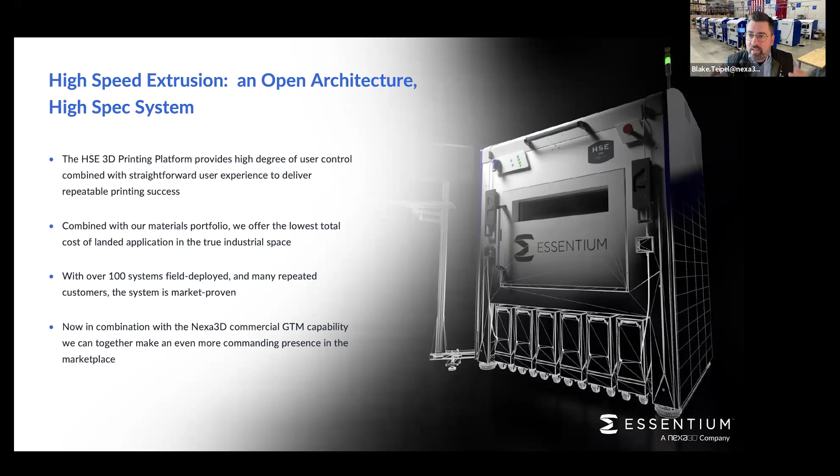Industrial is a broad sector. It touches a lot of the manufacturing and sustainment and parts and supply chain aspects of the industrial community, and we've got many customers in that section.

And of course, not to leave behind biomedical, automotive, or contract manufacturing. As we'll get into in some of the later content, some of the materials that Essentium offers have been custom engineered really for the contract manufacturing vertical.

What I mean by that is we have materials that are ESD, or electrostatic dissipative safe, but they're also clean room safe, and that's a really important distinction.

We have materials at both low and high temperature ranges that can go through things like wave solder ovens and reflow ovens, and be useful in contract manufacturing workflows involving printed circuit boards, printed circuit board assembly, and electronic device assembly and so on.

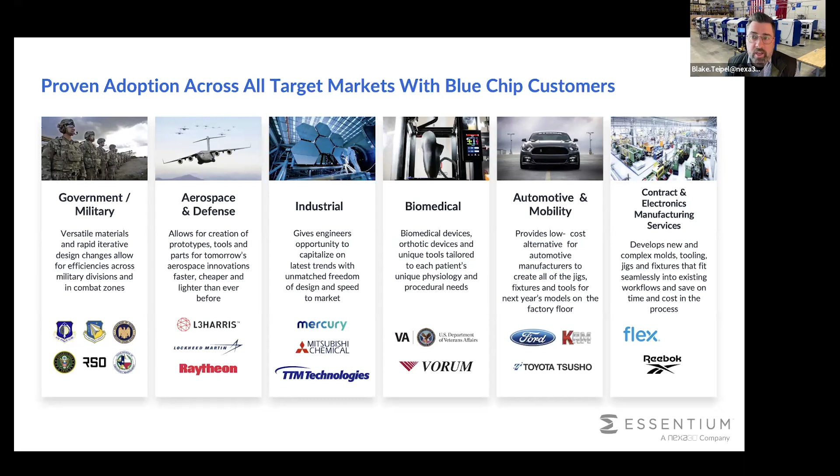So I think that's certainly something that bears mention.

Again, just diving more into a bit more detail on the high-speed extrusion platform. I won't get into all the specs, I'd direct your attention to our website, which has gone into great detail on both the HSE 180 and HSE 280i machines. A lot of details can be found there.

But at a high level, we've got an XY stage at the top of the printer, then a Z tray that descends, controlled by three independent ball screws - two at the front corners, one in the back. We've also got filament feed up the sides, with filament canisters across the bottom.

The machines are supplied at the time of sale with two canisters. If you want to store additional materials on the machine, you can purchase additional canisters. The machine will hold up to 6.

The user interface is off to the side, so you can walk through either a touch panel user journey, or if you're more comfortable with a keyboard and mouse, that's still available. Over time we're going to migrate more purely towards a touch panel based interface, but at the moment you can use our user interface either way, which is very similar to what you'd see with mills and lathes.

In many cases you've got sort of pointer-based control and so on. We decided to go that direction to make the machine accessible to those technicians and users familiar with the CNC type journey.

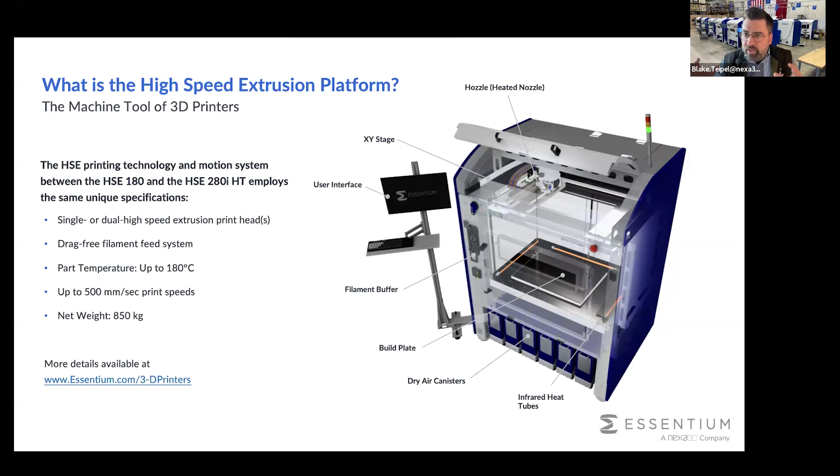If you have batches, if you have repeated part production, turning to an HSE will be awesome because you have the same performance as classic FDM for a single part. But when you need to print more parts, you can dial in geometries, dial in G-code, optimize the process, and really fly. That's how we built the system.

So we've got two different models: an HSE 180 and an HSE 280i. I'm going to talk about the 180 first. The 180 is actually split into three different submodels, and these are pertaining to the temperature ranges of the system.

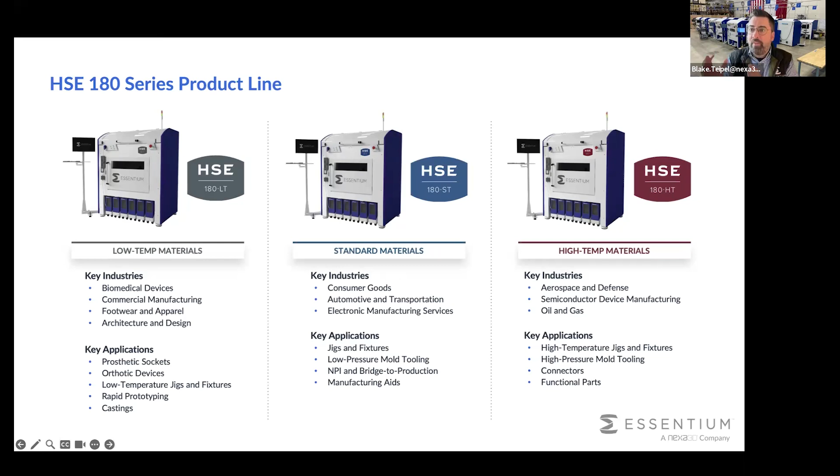As far as the 180s go and the line, we've got the low temperature version, the standard version, and the high temperature version. The low temperature is basically an enclosed chamber, but it's not insulated and not actively heated. So if you want a utility machine for fixtures and jigs only, and don't care about aerospace or automotive materials, a low temperature LT could be a perfect machine for you.

It still uses the same motion system, the same extrusion system, the same nozzles, and so on as its bigger, higher temperature brothers up the line, but it's designed to be a utility machine you can put on the floor and use with polyester materials, some nylons, things like that, and be successful all day long. But if you've got a higher spec material you're really interested in, I'd go either to the standard, or if you're aerospace, you really need the high temperature system.

The high temperature system works with PEEK, PEKK, and PEI — that is to say, the Sabic Ultem brand. We've qualified many parts with our aerospace and Air Force customers using 180 HTs.

Now these are a single head system — the one denotes a single head system. So this is a utility machine again, and we use breakaway support material strategies. If you have overhang or geometries that need support, you just use breakaways. We've done this with thousands of parts, and it works just fine. So that's great, but again, single material, single head on the 180s.

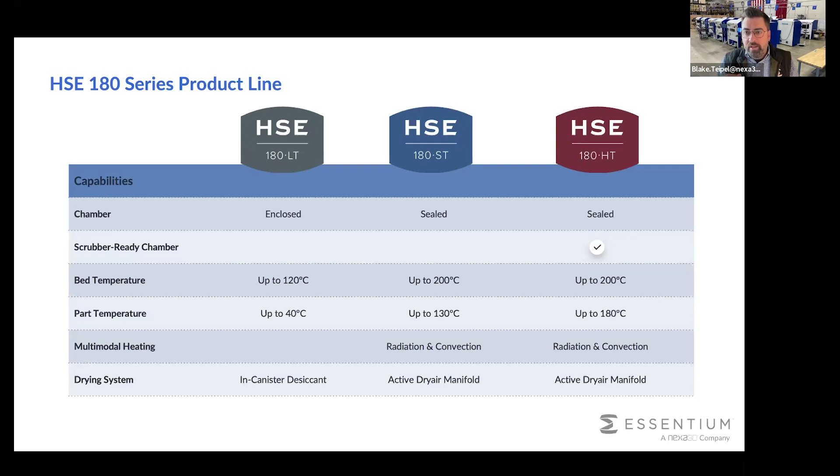When you switch to the 280s, you get access to different print modes. The 280s have independent heads in X and Y, so you basically have the linear motor motion stage I mentioned earlier. On the 180, you've got a single head that's moving around, printing a part and going real fast — it doesn't have to worry about clearance geometry calculations or anything else with a second head, it just flies. When you hit the 280i, you get access to these additional print modes.

So if you want to run multiple materials, you can. If you want to run support materials, that is water-soluble support, you absolutely can. If you want to run copy mode and produce two parts at once, that's tapping into some of that value proposition of the twin head machine. And then coming at some point in the future will be an independent mode where you can produce two different part geometries at the same time. The 280i is really a machine we designed to be, in some degrees, future-proof, or at least future insulated, because the machine can get smarter as the software gets smarter.

The machine can do things now that the slicing software isn't there yet for, right? So we actually have capabilities baked into the system that as the future architectures of slicing softwares become more and more performant, we will be able to allow our users to unlock more capabilities with that 280i, and really get that machine to do, I think, really important things that are not available on either a tied IDEX system where you share an axis, or on a single head twin nozzle system.

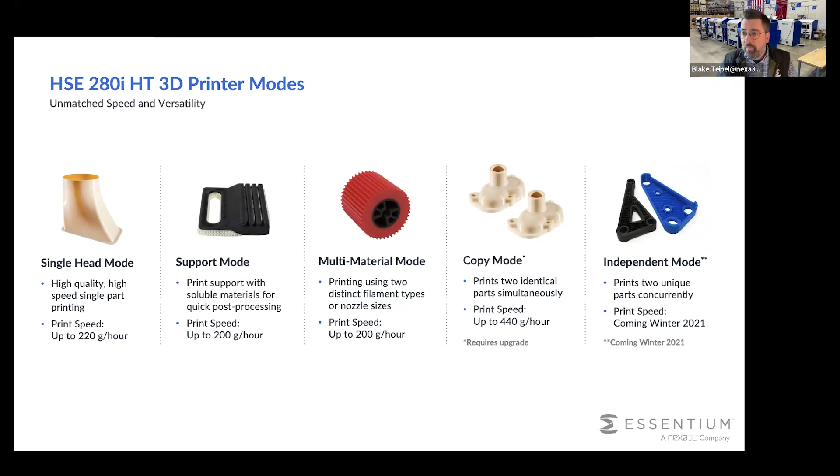So, okay, let me talk about some case studies, right? What have our users done? What have our customers done? I'm just going to highlight about a half a dozen or so case studies here today, and give you that mind share about how these machines are used and where some of that success comes from.

So start with Mercury Systems. Mercury Systems is a contract manufacturing business. This particular installation was in Arizona. They put a machine to work in their shop upstream of the actual reflow ovens. So they had to print what's called a masking type geometry. These are simple looking parts. You might ask yourself, why are you printing these parts?

Well, the state of the art that this is replacing was basically tape. What would happen is the componentry would be loaded on top of a circuit board, and then there would be tape or some other kind of manual application to protect sensitive components from going through a downstream process step where there were higher, elevated temperatures that would damage sensitive components.

So what we allowed Mercury to do was to do away with an entire manual step. They already knew in their manufacturing software the footprint they needed to protect on top of circuit boards. So they took that geometry of the footprint, turned it into an STL, and were able to print the parts out of our TPU 95 ESD safe material. We also have a nylon and a couple of different, even, a polyester ESD safe material. So they had a wide variety of mid-range materials they could turn to that were temperature capable enough to survive that downstream step.

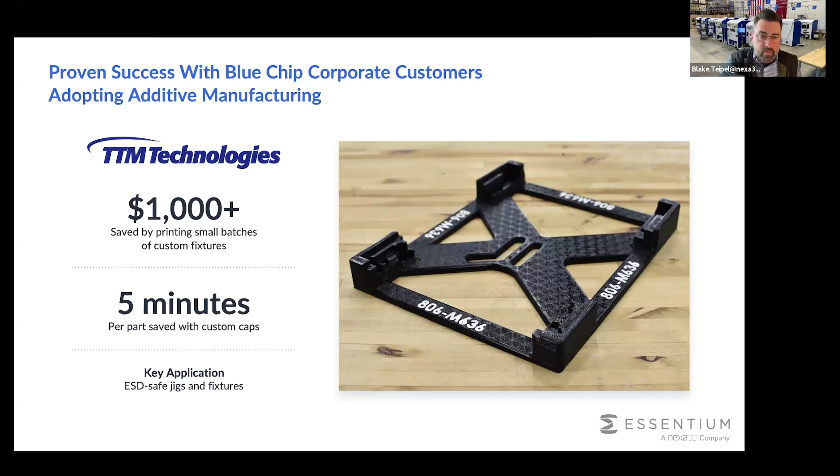You've got the machine right there. It's flexible, it's a fixtureless machine, and it creates the fixtures and jigs right there on the factory floor for you. It takes 5 minutes. In this case, it was really a big time and cost save for these guys.

They used 2 different materials from Essentium. They used our PACF, a carbon fiber polyamide — that's a nylon, polyamide 6/66, kind of a mid-range polyamide with a high degree of ductility, very ductile. It's not stiff at all, super ductile. That's important when you're making a drone because drones sometimes don't land in the most graceful of fashions. You don't want the part to crack or break, so you want a material that's very ductile but still has toughness. That's where the carbon fiber came in for them. So selecting our polyamide carbon fiber was the perfect material for this drone body.

This particular project, I remember, was for a startup company out of California a couple of years ago, when there were really intensive forest fires in California. This company was designing a mid-sized drone with 6, maybe 8 rotors, designed to help fight forest fires — you could lift hoses up to the height of trees or houses using the drone, really giving firefighters another tool.

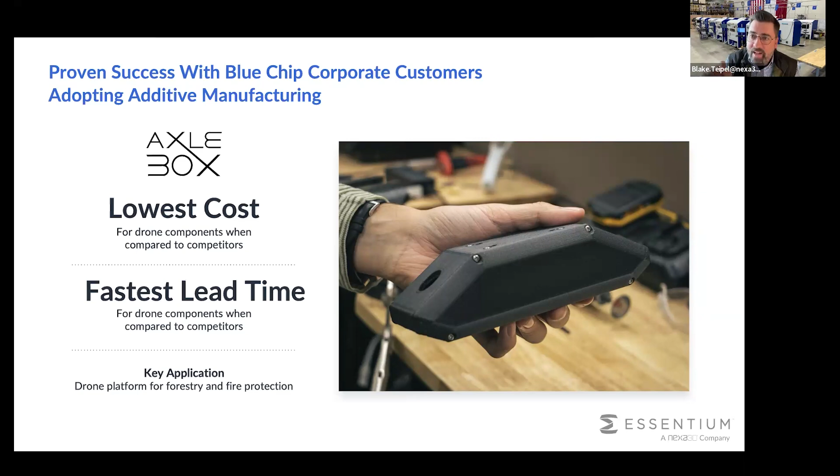So we could do 25% carbon fiber. How do we do that? It's a pretty interesting secret, and I'll tell you on the coming pages. But 25% carbon fiber, high temperature nylon resin — a nylon combined with polyphthalamide, an amazing material. This is one of our most requested, most sought after materials, and it was used here again in this drone application. Very strong — the compressive strength of HTN CF25 matches the compressive strength of aluminum. It's incredibly, incredibly strong.

What do we do with Reebok? Man, I love this project. This took place a few years ago — if you want to Google it, you can find it under the Liquid Factory. They were designing a process to go into production with a metal moldless line of footwear. This is Reebok North America, out of the Boston facility. Hats off to these guys, highly creative, really looking for opportunities to bring a portion of footwear manufacturing back to the United States.

This whole idea, Liquid Factory, was about how we can use a high degree of automation and make shoes that we can afford to produce in high-cost countries — addressing the supply chain issues that are so present in the world. Look at the Suez Canal, look at the Panama Canal, by the way — it's not a good time to be a canal. But all the supply chain issues are there, and producing in a local or regional fashion is always thought of as one of the key options that additive manufacturing unlocks. We help them unlock it, actually.

So this picture is a little fuzzy, but what it is, is a last.

It's a footwear last of a shoe. This was printed from a custom resin that we worked on and produced in our factory, custom resin for Reebok. It had a polypropylene glass fiber filler. The polypropylene was important because when you print with it, you get a nice non-stick surface.

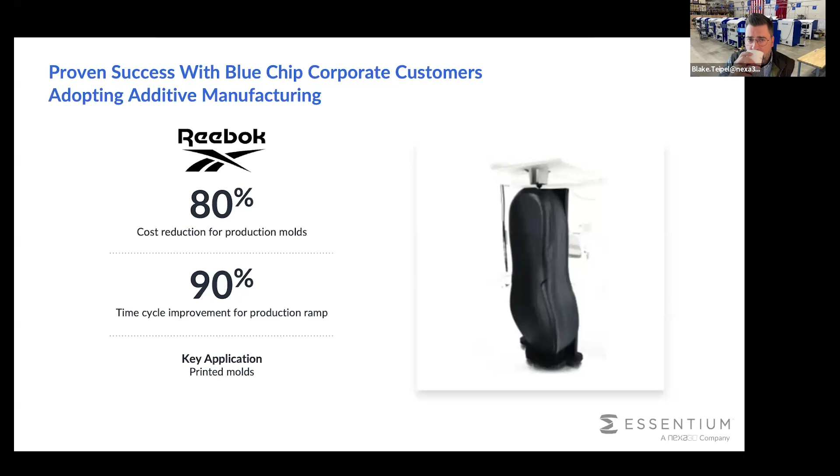All right, so Cam Kozlowski. If the name Keselowski is ringing any bells, and we've got any racing fans in the house, Brad Keselowski is a highly accomplished NASCAR driver. He races, I think his number is number 2. I know he used to be Penske number 2, now I think he's got a different team. But Brad is an amazing guy.

Instead of taking his winnings and buying car dealerships, and I'm not saying anything wrong with that, I'm not throwing any shade, that's fine, what he's doing is taking his money and putting it into advanced manufacturing. So he built KAM, which is Keselowski Advanced Manufacturing. It's in North Carolina, an amazing machine shop that uses both additive and subtractive together.

So he's got all different flavors of additive. He's got extrusion, he's got laser powder bed fusion metal machines, and then he also has subtractive. He's got Mazak machining centers and maybe some Haas. I don't remember all the machining centers he's got.

But what he does is he prints high-spec preform parts, and then takes those parts downstream to his own CNC, and does the machining, whether it's creating threads or datum surfaces or sealing surfaces or whatever. He'll take those parts, finish them on the CNC mill, and send them down the road. He uses our systems for fixtures and jigs and so on.

This has been a huge time save for him throughout his operation, because his operation is kind of a mid-sized machine shop. I talked earlier about a lot of factory applications, large enterprise, large blue chip, again the Mercury TTM, there's many other examples of very large enterprise. This is a mid-sized machine shop, high spec, high flexibility, high mix, small batch size. We put machines on the ground that help them be flexible, working in an additive, subtractive workflow together. Really exciting project.

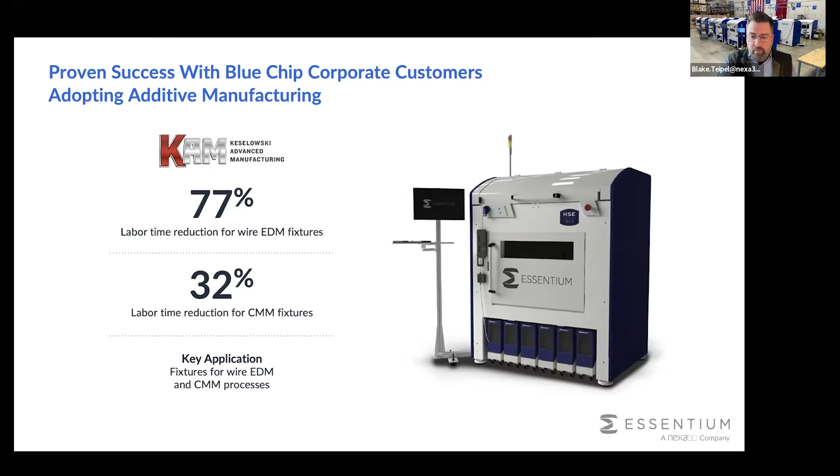That was a lot of fun. And then finally, on the military side, we worked with our partners at the Rapid Sustainment Office, the Air Force Lifecycle Management Center, LCMC EZP, the Engineering Directorate, underneath AFMC, which is the Air Force Materiel Command.

So, yeah, military, right? I mean, the military uses a bunch of old stuff, like most of the planes and most of the backbone of the military here and with our allies. You see it all over the world, old vehicles, right? Old, whether it crawls or drives or flies, most of the stuff is old. You've seen stories of certain bombers that the United States built back in the 1950s that are flying today and have a planned service life of 100 years.

And when it's an airplane that flies around the world all the time, and it's going to last for 100 years, I mean just think about that, it's mind blowing. So how do you sustain these systems for their entire life? The original manufacturers of these vehicles and aircraft don't even exist anymore, they're gone. So the Rapid Sustainment Office was formed as a part of the Air Force, set up back in 2018 by Will Roper. He was the Assistant Secretary of the Air Force for Acquisition Technology and Logistics. Brilliant guy, brilliant guy.

He set up the RSO and he said, okay, I want you guys to have the mandate to sustain America's fleet of aging aircraft and do so on a rapid basis, because we, the Air Force, cannot rely on always being able to source parts from a supply chain which may not even exist anymore. You think about the supply chain challenges that are tough today for consumer device electronics, shoes, footwear, computers. Imagine you're flying a bunch of old stuff and the companies that built it don't exist. That's a true supply chain challenge.

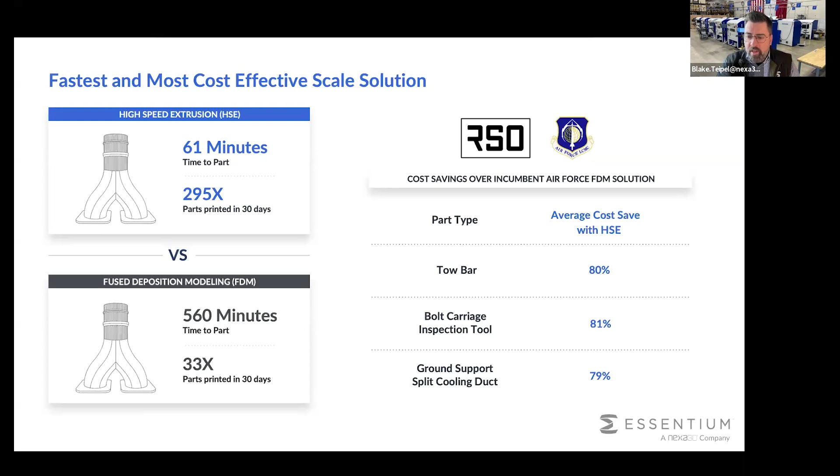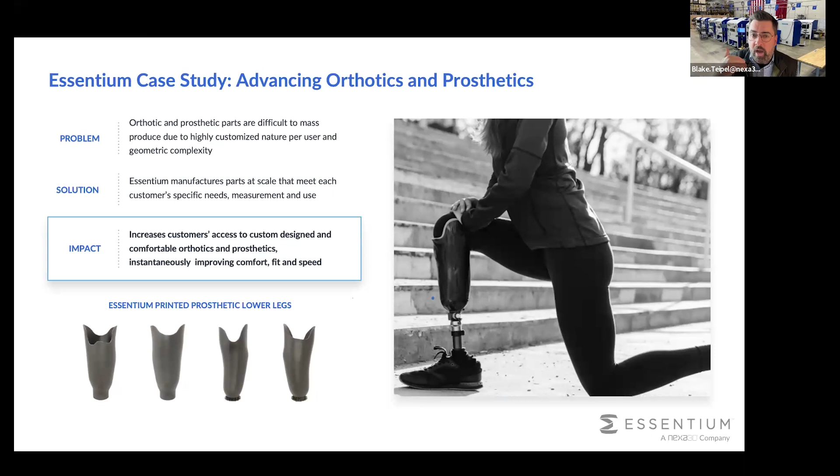Prosthetics and orthotics, we have a series of materials. We have 4 different grades of materials that are found and tested by the University of San Francisco and others to be biocompatible safe. So safe for contact with human skin. This means that some of our clients turn to Essentium because we can have materials that can go into prosthetics and orthotic applications. We've got many examples of that.

I'm going a little long on time, so I'm going to try to speed it up a little bit here because I want to make sure there's time for Q&A. Like I said, we have multiple systems and polymeric systems for aerospace parts, as I've mentioned. So aging aircraft, C-130s have been around again for 50 years, will be around for a lot longer. We also have FOD covers.

So we've got an anti-static material. It's a TPU 58 Shore D anti-stat material that comes in red, and it's designed to be red because you've got to remove it before flight. One of our customer applications was going in and printing parts to cover satellite geometries before satellites would get launched, covering sensitive components they wouldn't want to get dust on or any sort of foreign objects on. So they would print these covers.

They're TPU, so they're flexible. They can kind of squish a bit. They go over these sensitive components, and then they're red, they stick out like a sore thumb, and you remove them before flight. So that's a key application as well.

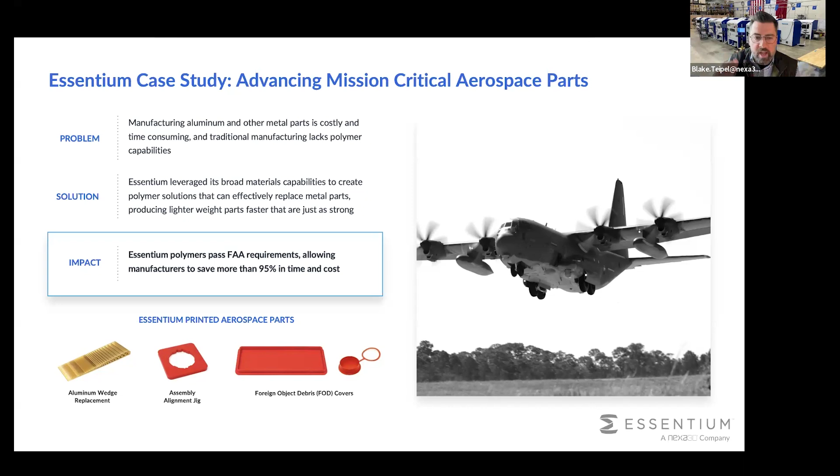So there are many applications, true industrial use cases. I really encourage you guys, we're happy to be here and coach you and walk you through this. Again, with our new partners at Nexa 3D, it's going to go really, really well. We're excited about that.

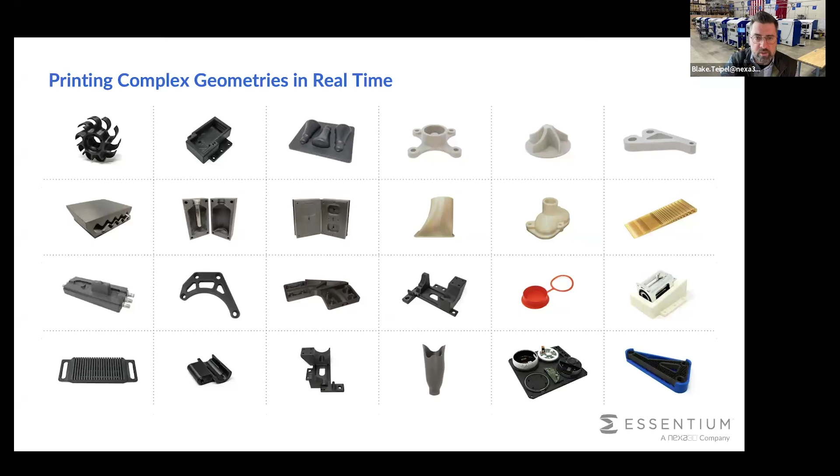A lot of different applications across the industrial landscape - jigs and fixtures, tooling, end-use parts, prototyping, castings. One of the recent areas we've spent a lot more time in is casting patterns and casting core boxes. The large size of our systems, near 700 millimeters in X, can produce casting patterns and cores too large to fit on some other systems out there. So the build size can be a real advantage, especially in castings.

Just last year, 2023, we saw a flurry of activity in the casting space, and we're excited about that too.

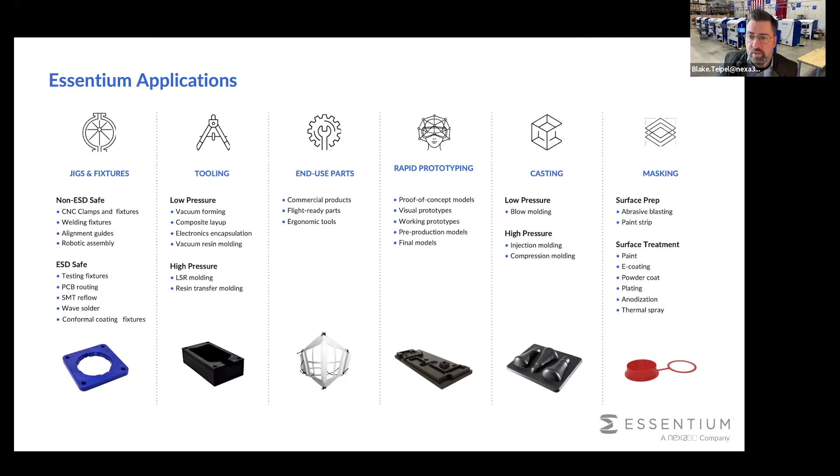All right, let me talk about materials. With the HSE and Essentium, if you pick up these products and start using them, you get access to a broad basis of materials - over 27 different grades of industrial materials available. You can go to our website, Essentium.com, click on the materials link to see how the materials are organized, and I'll show another page about that here in a minute.

We make both monofilament and multi-layered filament. We're the only company in the world that makes multi-layered filament. That matters because you can get high spec materials at low prices - our prices are not crazy, and you can buy materials through our web shop. Making a multi-layered filament allows you to do a variety of important things.

Remember I told you earlier I'd tell you the secret behind our HTN CF25? The secret is it's a multi-layered filament. We put that high spec, highly packed 25% carbon fiber core, and put a thin candy coating around the outside of neat polyamide, polyphthalamide material - same chemistry, just neat resin. That creates this sheathing, like a glue sheathing - you can almost think of it like a sausage. One of our guys used the illustration of sausage casing, keeping all the good stuff on the inside. There's a thin casing shell that keeps all the good stuff inside our filament materials.

Many of our high-spec materials, both the high-spec carbon fiber materials and the ESD safe materials, use multi-walled carbon nanotubes. We put these into a polymer master batch and let them down to very low concentrations, less than 1 gram per kilogram, which is less than 0.1%. We get clean room safe, consistent ESD properties because it's a nanomaterial concentration that's been nicely dispersed and fully encased in a polymer master batch. So you don't have to worry about nanotubes flying around, getting in the air. This has all been tested.

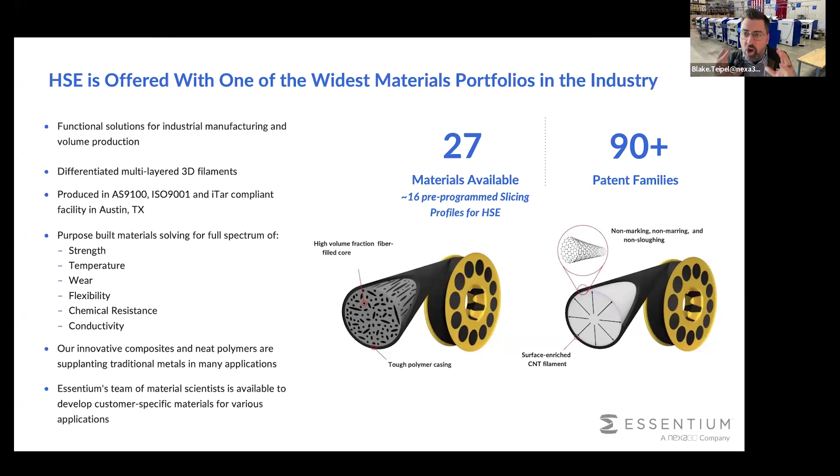The Belgian government did a series of exhaustive tests on these materials, and the US government has done similar things. These are safe, easy to use, and they produce amazing, consistent ESD performance while providing a clean room safe environment because of the polymer master batch that encases the whole thing. But it's a core shell structure - I don't need to put nanotubes throughout the entire filament, I can just put them where I want, right on the edges. That's an architecture and material science win that we love bringing to our customers every day.

Here's a snapshot of our filament portfolio. The stars indicate those sold in the highest volumes and used the most. General purpose materials are going to work great on the LT machines, along with the flexible materials, except for Duratem.

Duratem is a material we just launched last year. It's an Ultem-like material that has a lot of ductility and toughness. We basically modified the polymer backbone of polyether imide - I won't get into detail how, because it's super esoteric, but if you want to learn more, reach out. We modified the chemistry of Ultem to make it more flexible, so now if you print an Ultem part and drop it on the floor, you don't have to worry about cracking it, because Ultem is incredibly brittle - the material is so brittle. By creating Duratem, we've created a durable Ultem, just launched last year, and we couldn't be more excited about it.

You need a high temperature printer to print it because it still has the Ultem polymer backbone, and it still passes the flame, smoke, and toxicity and V0 burn critical tests that Ultem has to pass. Duratem passes all those, which means it's useful for aerospace in-flight parts, which we love.

High temperature materials as well - this is where you start getting into needing the HT on the 180 side. By the way, the 280 only comes as HT, so you don't have to worry about the 280i - you can get all of Essentium's materials.

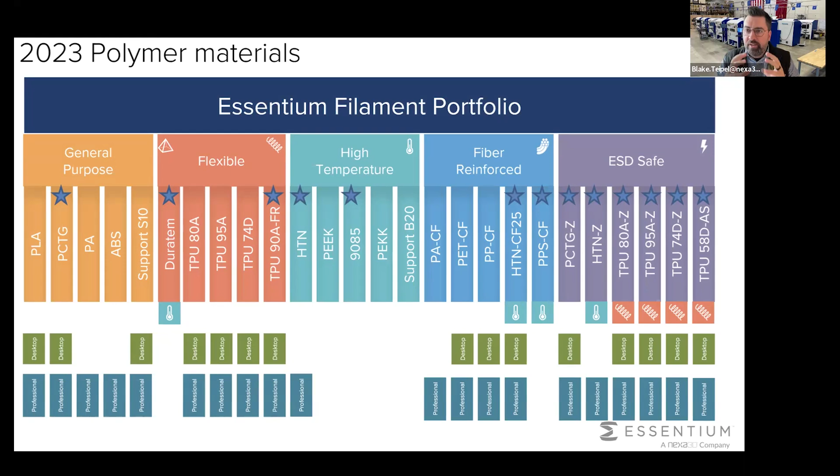Again, HTN - so you see, if you see a Z on it, you just know that that material is multi-layered, because the Z basically means it's got that thin candy coating of the nanomaterials that provide the ESD safe properties. So that's what the Z designation means.

Okay, so how are these materials used? I'm not going to go into all the detail here on this particular page. Just know that when you sign up to work with us, we will coach you through tooling applications, jigs and fixtures, masking, automotive, energy, and aerospace. And there's all kinds of applications within these verticals.

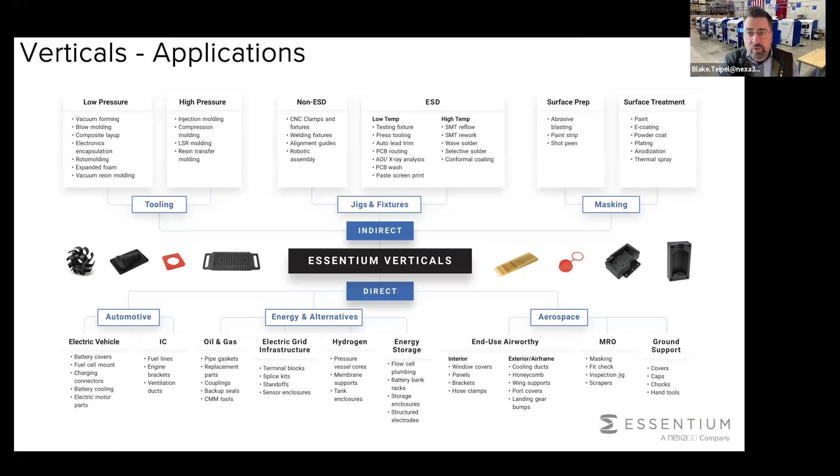And how do the materials match up, by the way? I'm so glad you asked. The materials match up perfectly, and we've organized our materials to go into all these different vertical spaces, and we'll coach you through this. Don't think you have to learn or absorb or understand or retain all of this right now. We will coach you through this, and we'll provide more webinars, more coaching, and of course you can always find all the information you would want on our website.

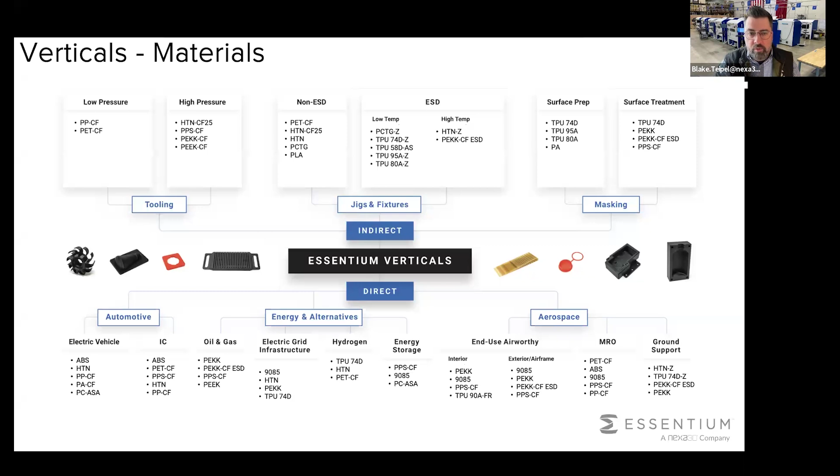We also, by the way, offer dry boxes. Dry boxes are so important, guys. Whether you're printing from a liquid photoresin system, a powder bed fusion system, or a filament-based extrusion system, that raw material needs to be kept dry. And the way you keep the material dry and provide flexibility for material changeover is by using a dry cabinet, a very high spec dry cabinet. We call it a dry box. This is a material storage cabinet that'll store resins, powders, or filaments.

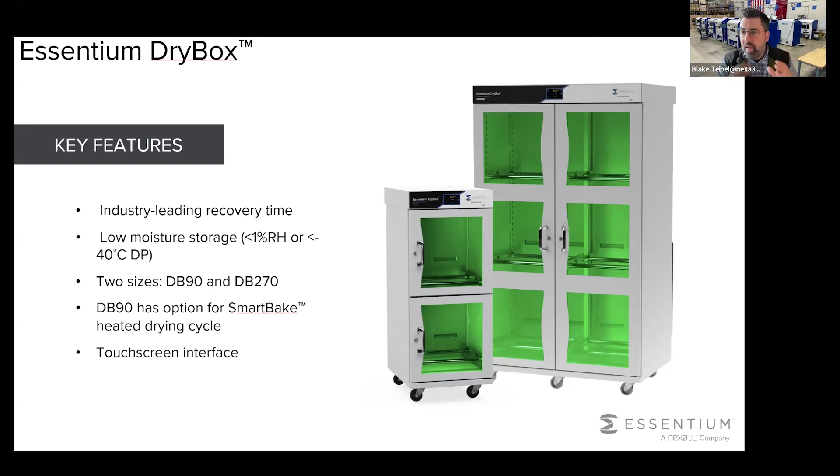It's, again, an open architecture system. This is a really high spec material storage device. It has rapid recovery down to very, very low relative humidity. It's got this nice indicating light system - so if you leave the door open for too long, it turns red and it starts beeping at you.

It's like, hey, you're letting in all this moisture, don't do that - so people can close the door. And then when it's pumping down and recovering and getting all the moisture out, it's yellow. And then when it's really happy, at steady state, it turns green. So you can see that.

And by the way, it's network connected. So if you care about your high spec workflow, and you're like, I need to know that this material was kept safe for months and months, which you can easily do with these cabinets, then you can actually monitor that system online. You can see when was the door opened, was the door left open, is this material at risk of being exposed to too much moisture. You can really use these systems for that.

And these are available again for sale. So whether you buy an Essentium HSE printer or whether you have other systems, you can buy these from Essentium, Nexa 3D, and use these in your ecosystem.

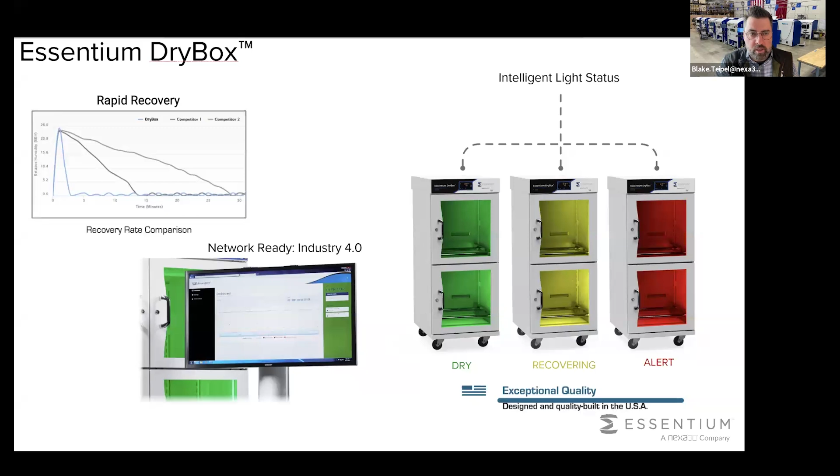So one of the last pages here, do want to touch on the pipeline. We are still in the late stage engineering activities for our HSE 240. The 240 is around a 40 centimeter build tray, so all the performance of HSE on a smaller footprint. This machine was designed to fit through European width doors - like an 800 millimeter door - so you don't have to have a loading dock or some sort of dual door device.

It's designed to go down hallways. But again, it's got a 40 centimeter build tray, so it's a smaller machine. It does have a high spec servo motor, linear motion stage, all the same kind of guts of an HSE 180 or 280i are present in the HSE 240. It is a single head twin nozzle system.

We couldn't package IDEX in a way that really made sense in a small package, so we went with a single head, twin nozzle. The nozzles move up and down. Still a full servo motor on the extrusion drive, high torque. This thing's got torque for days.

This will come out soon, later this year, and we'll talk about timing on this as we get closer to launch. If you've seen these at trade shows, just know Essentium has been working on this product, and now Essentium and Nexa are working on it together, and we're going to launch it and make sure it's available through the Nexa channels. We'll talk more about that as the timing gets closer.

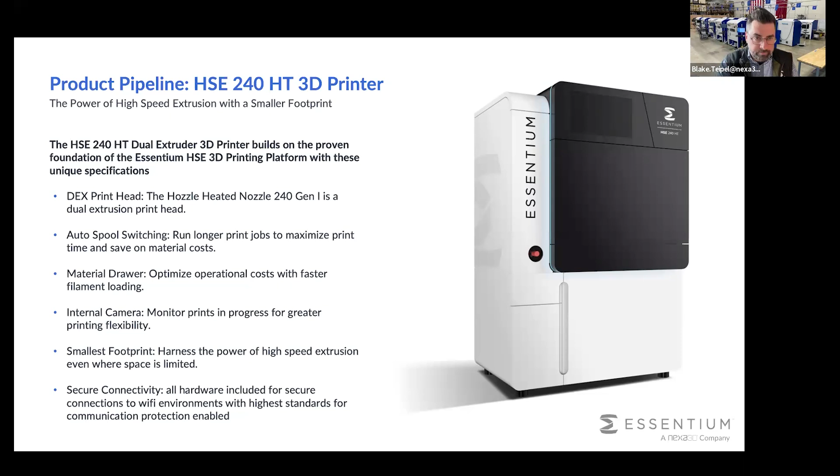Because a lot of folks think, oh, I'm ready for all that freedom, I'm ready for going fast at high speeds. It's like jumping into a Formula One car - I'm so excited about going fast. Well, if all you need to do is go get groceries, then you might crash that car. And we've seen that, and it's okay. We're here to support you, and we're going to do that in a high touch way.